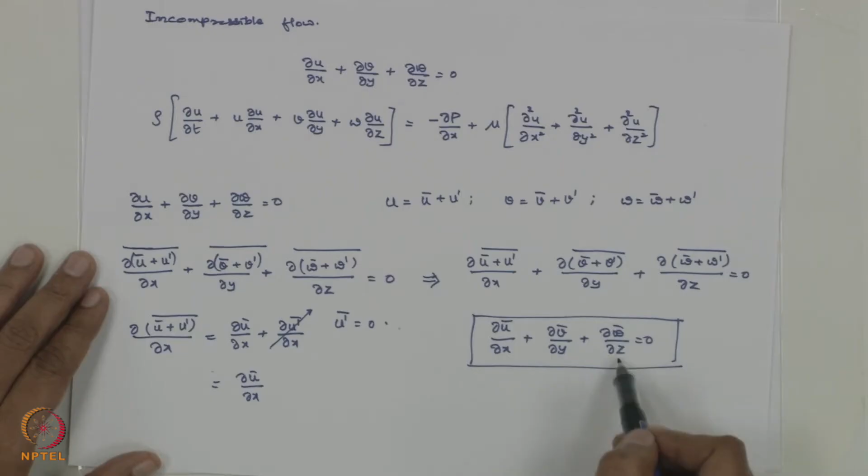In the last module, we had started and defined turbulence, and we introduced the concept of the fluctuating component and the mean motion. We time averaged the incompressible flow continuity equation and got this: del u bar by del x plus del v bar by del y plus del w bar by del z equal to 0. There's nothing new here, the equation looks the same.

Now let us take the x momentum equation. The x momentum equation is rho into del u by del t plus u del u by del x plus v del u by del y plus w del u by del z equal to minus del p by del x plus mu times del squared u by del x squared plus del squared u by del y squared plus del squared u by del z squared.

So you get this. Now let us replace u with u bar plus u prime, v with v bar plus v prime, w with w bar plus w prime, and p with p bar plus p prime, and time average. So we are time averaging the momentum equation. This is also called Reynolds averaging, because Reynolds had apparently done this for the first time.

But before I do that, I need to rearrange this a little. So: rho into del u by del t plus del u squared by del x plus del of uv by del y plus del of uw by del z equal to minus del p by del x plus mu times del squared u by del x squared plus del squared u by del y squared plus del squared u by del z squared.

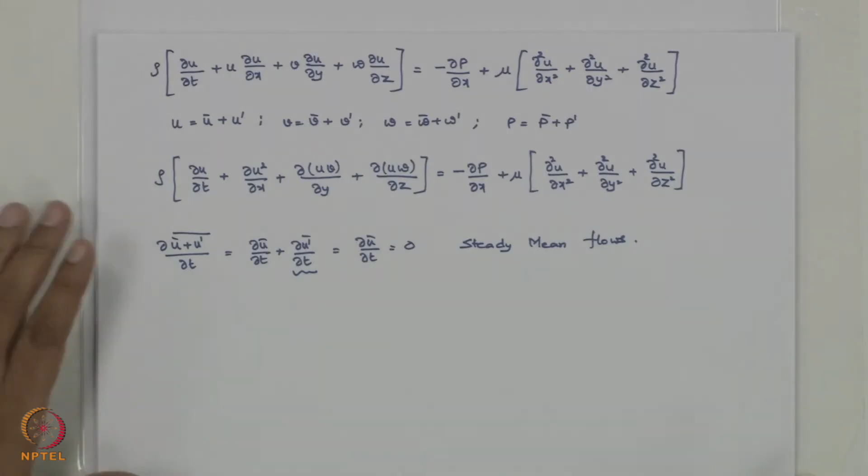But I am considering steady mean flow, that is, if I put a pitot tube and look at my manometer, the manometric value is not changing, so the mean component u bar doesn't vary with time. So del u bar by del t equal to 0. If the flow itself is unsteady, you will never get del u bar by del t as 0. But we are considering steady mean flow.

Now the next term, del u squared bar by del x equals del of u bar plus u prime whole squared bar by del x, which gives del u bar squared by del x plus del u prime squared bar by del x plus del u bar u prime bar by del x. We have seen that if you time average u prime bar, you get 0, so that term vanishes. So I write this as 2u bar del u bar by del x, taking that out, plus del u prime squared bar by del x. This is what we get when we time average del u squared bar by del x.

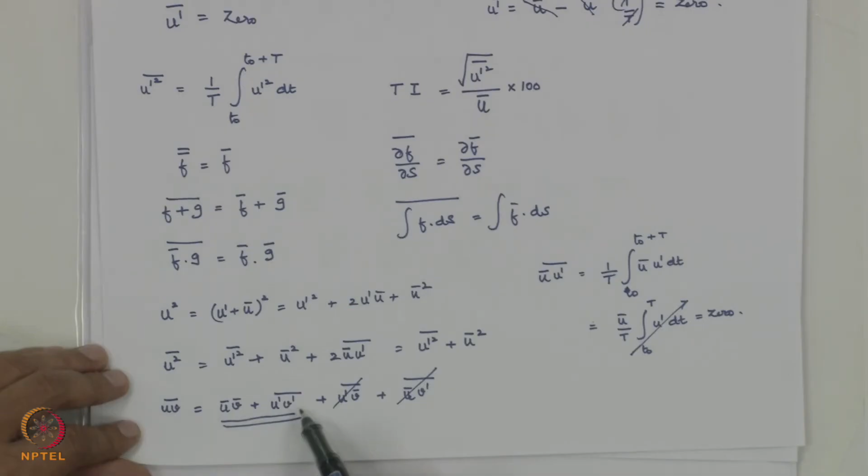Next term is del of uv bar by del y, that is del of u bar plus u prime into v bar plus v prime, bar, upon del y. If you recollect, when we did u bar plus u prime times v bar plus v prime, we ended up getting only u bar v bar plus u prime v prime bar. So here you get del of u bar v bar plus u prime v prime bar by del y. You could also write this as u prime v bar bar plus u bar v prime bar, just for completeness, but these terms will be 0.

So I will expand this: you get u bar del v bar by del y plus v bar del u bar by del y plus del of u prime v prime bar by del y.

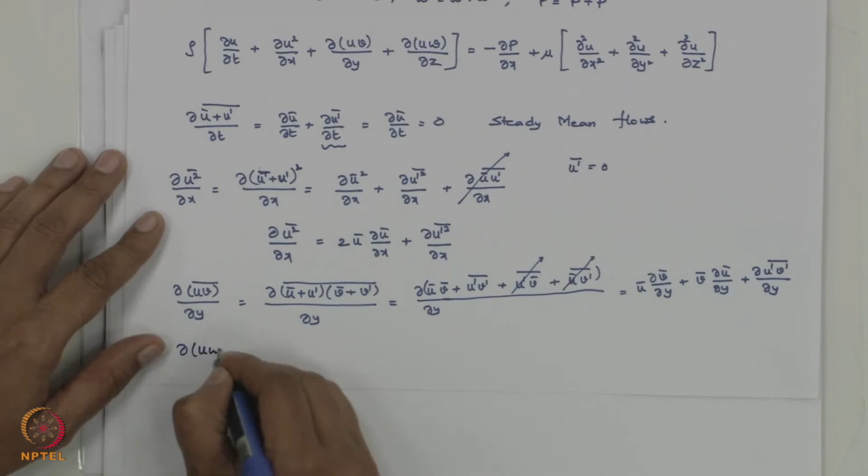Okay, similarly, without doing the full derivation, I can write directly del(u w bar) by del z equal to u bar del w bar by del z plus w bar del u bar by del z plus del(u prime w prime bar) by del z. So that completes the left hand side, all the terms we have completed.

Similarly, I can write directly del(p bar plus p prime bar) by del x equal to del p bar by del x, because del p prime is 0. Similarly, I can write del squared(u bar plus u prime bar) by del x squared equal to del squared u bar by del x squared, because u prime bar is going to be 0.

So substituting all of this in my momentum equation, I will get rho into del(u prime squared bar) by del x plus 2 u bar del u bar by del x plus u bar del v bar by del y plus v bar del u bar by del y plus del(u prime v prime bar) by del y plus u bar del w bar by del z plus w bar del u bar by del z plus del(u prime w prime bar) by del z. This is the left hand side, is equal to minus del p bar by del x plus mu into del squared u bar by del x squared plus del squared u bar by del y squared plus del squared u bar by del z squared.

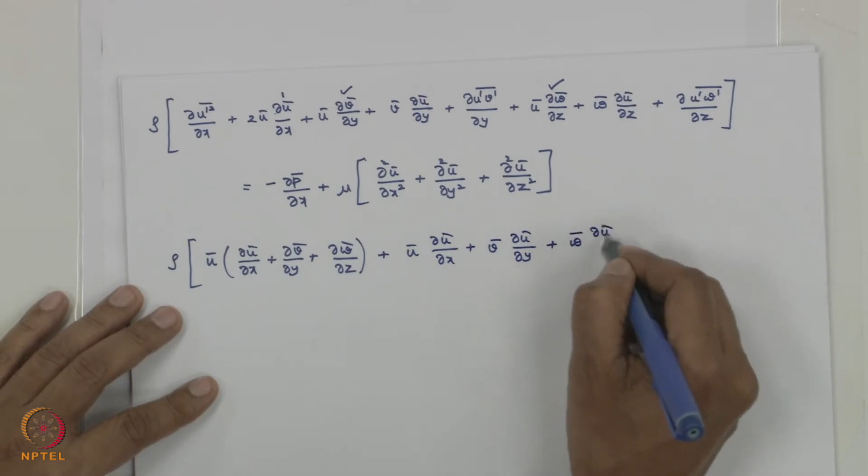Now, if I rearrange this, I can write this as del u bar by del x, taking one term common, plus del v bar by del y, plus del w bar by del z, if I take that. Then I am left with another term, that is u bar del u bar by del x plus v bar del u bar by del y plus w bar del u bar by del z, which is equal to all the terms left out: this one, this one, and this one.

This I am pushing to the right hand side. So I get minus del p by del x plus mu del squared u bar by del x squared plus del squared u bar by del y squared plus del squared u bar by del z squared minus rho, del(u prime squared bar) by del x plus del(u prime v prime bar) by del y plus del(u prime w prime bar) by del z.

So let us write, similarly, for y and z momentum equations. Let me write the y momentum equation first. So that is minus rho of... this has vanished, this is 0 by continuity.

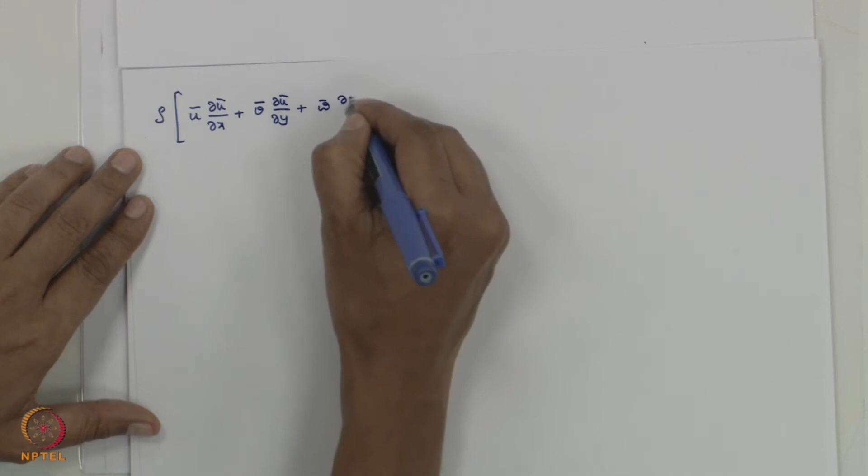So now let me write all the momentum equations. Rho into u bar del u bar by del x plus v bar del u bar by del y plus w bar del u bar by del z is equal to minus del p by del x plus mu del squared u bar, minus rho of del(u prime squared bar) by del x plus del(u prime v prime bar) by del y plus del(u prime w prime bar) by del z.

Similarly, the y momentum equation: rho of u bar del v bar by del x plus v bar del v bar by del y plus w bar del v bar by del z is equal to minus del p bar by del y plus mu del squared v bar, minus rho of del(u prime v prime bar) by del x plus del(v prime squared bar) by del y plus del(v prime w prime bar) by del z. That was the y momentum equation.

Let's write the z momentum equation: u bar del w bar by del x plus v bar del w bar by del y plus w bar del w bar by del z is equal to minus del p bar by del z plus mu del squared w bar, minus rho del(u prime w prime bar) by del x plus del(v prime w prime bar) by del y plus del(w prime squared bar) by del z.

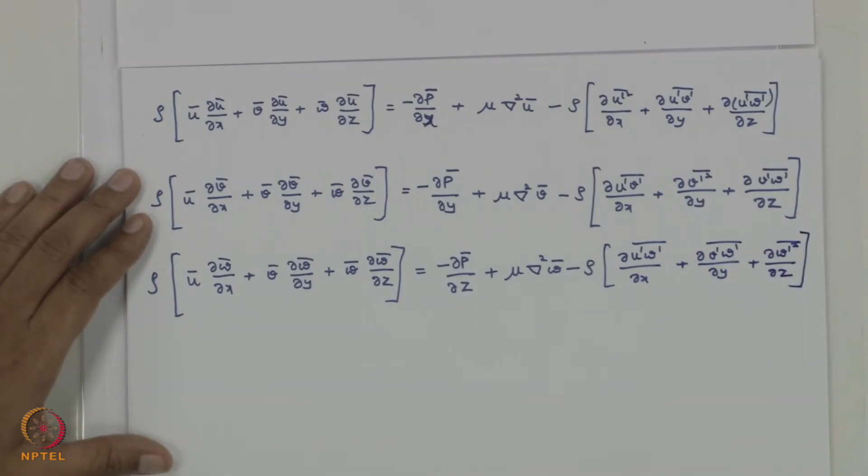Now what are these? If these equations were not there, and you only see the left hand side terms, these were the equations which we were seeing earlier. These are the terms which have come additionally because of Reynolds averaging.

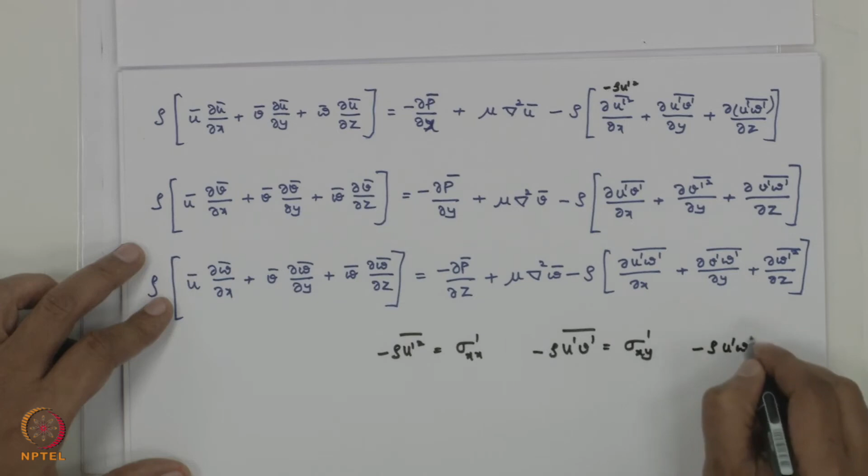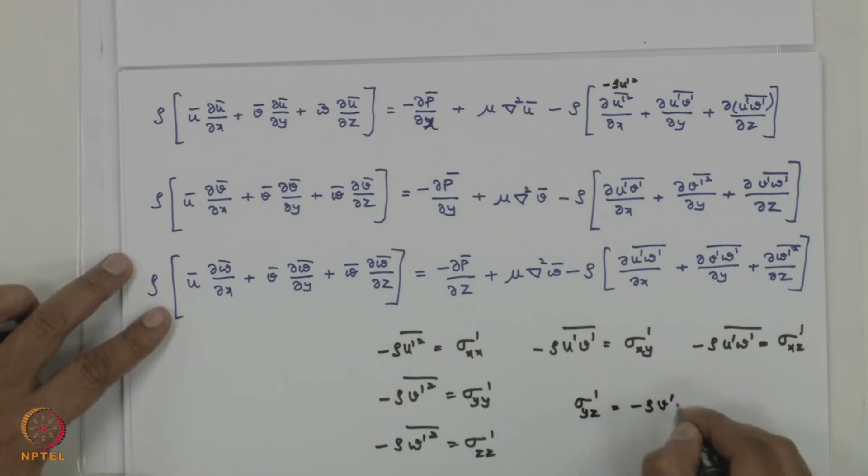So these terms can be visualized: minus rho u prime squared bar can be visualized as sigma xx prime, minus rho u prime v prime bar as sigma xy prime, and minus rho u prime w prime bar as sigma xz prime. Similarly, minus rho v prime squared bar as sigma yy prime, minus rho w prime squared bar as sigma zz prime, and sigma yz prime equals minus rho v prime w prime bar. Prime represents additional shear stress.

So what are these stresses? These stresses are additional stresses: sigma xx prime, sigma yy prime, sigma zz prime, sigma xy prime, sigma xz prime, sigma yz prime. These are the additional stresses in addition to our normal stresses.

In fact, we had sigma xx, yy, zz and sigma xy, sigma xz, which we wrote in terms of viscosity and the derivatives of the velocities - that is linear deformation and angular deformation. We put all of those together, and these are called additional stresses. They are also called Reynolds stresses because these were first derived by Reynolds in 1895.

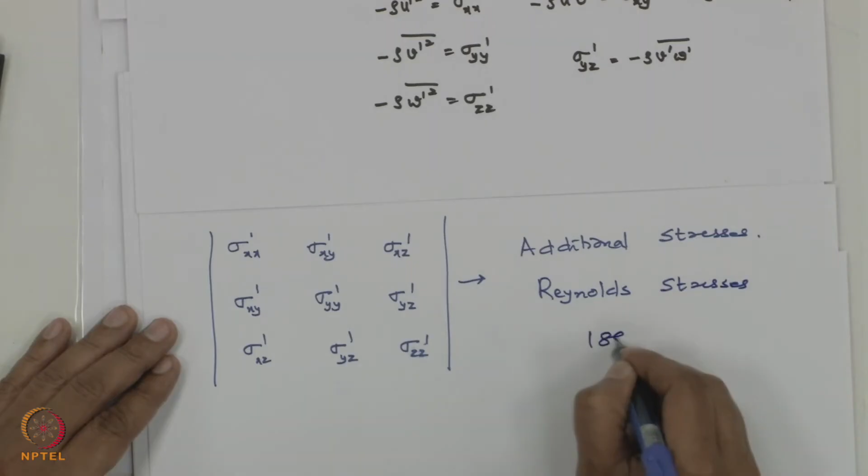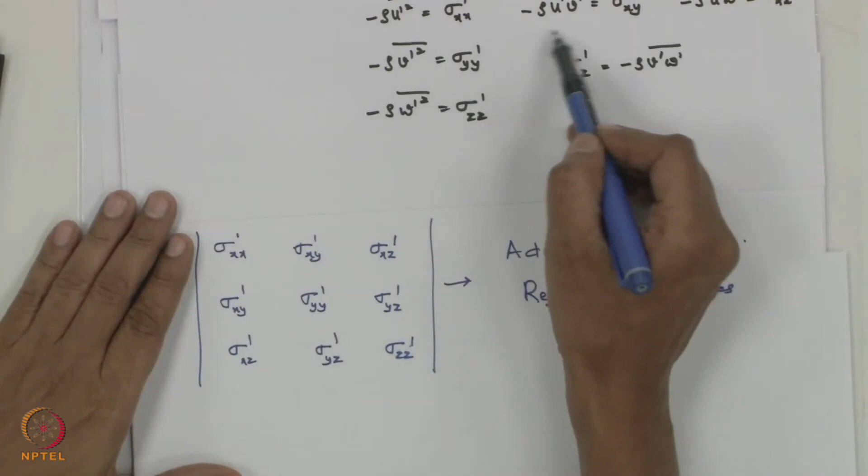So then there is one doubt all of us get: is minus rho u prime v prime really negative? No, actually minus rho u prime v prime happens to be positive. So what is the physical significance?

Let's consider a plane shear flow where the velocity varies like this - this is y, this is x, and this is the velocity profile. So u bar is a function of y, and v and w are 0. Now du bar by dy is greater than 0.

Let's say there is a transverse motion causing eddies to approach the layer y, meaning v prime is greater than 0, moving from a lower layer y to y plus l. So v prime is greater than 0. But since u is increasing from y to y plus l, the eddies essentially retain their original velocity u bar, so they end up with a negative u prime when moving with positive v prime. So minus rho u prime v prime is going to be positive.

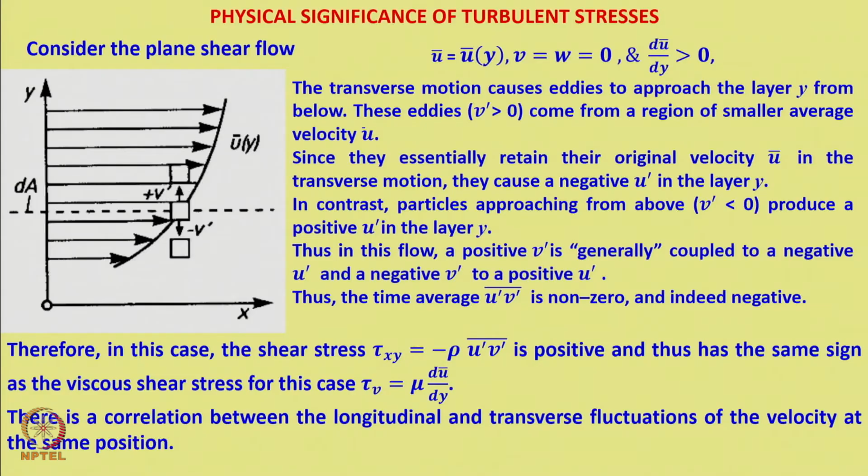So to summarize: if you have a positive v prime, you will have a negative u prime; if you have a negative v prime, you will have a positive u prime. So essentially u prime v prime is negative and non-zero, meaning minus rho u prime v prime is positive.

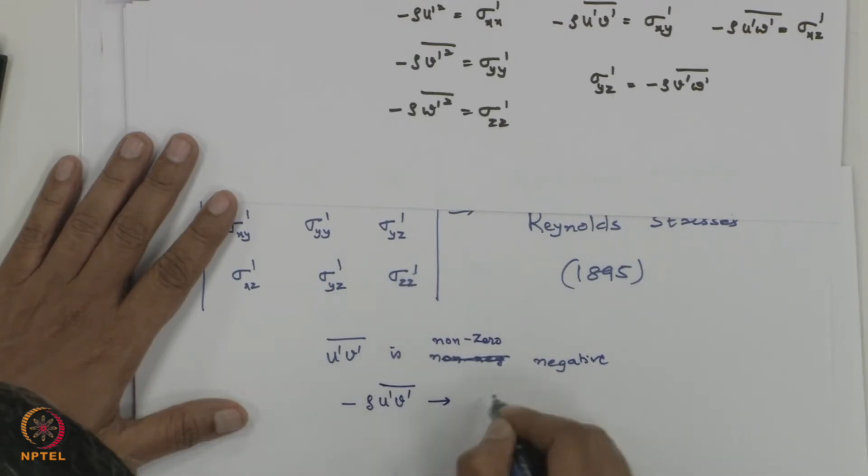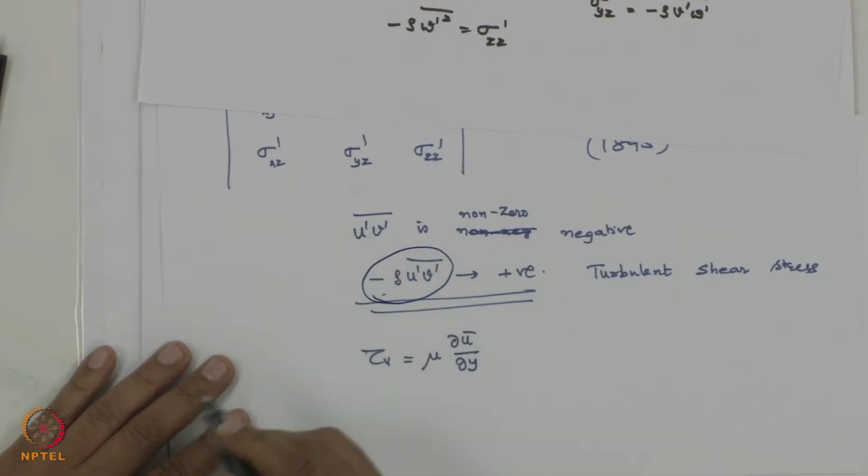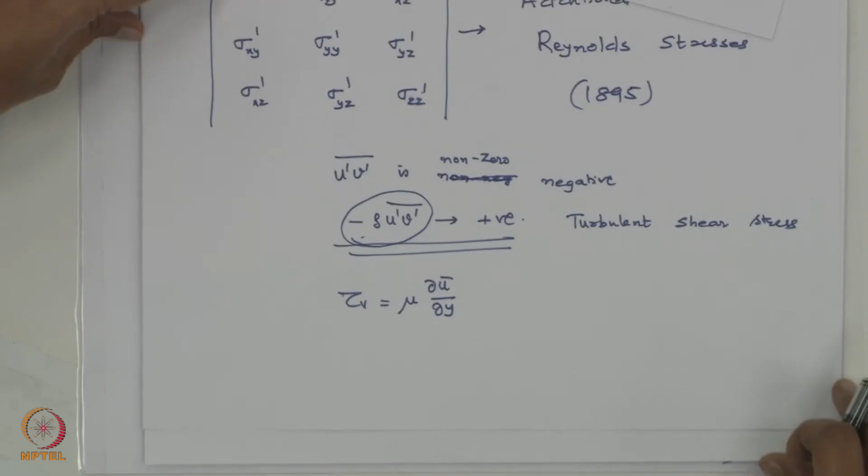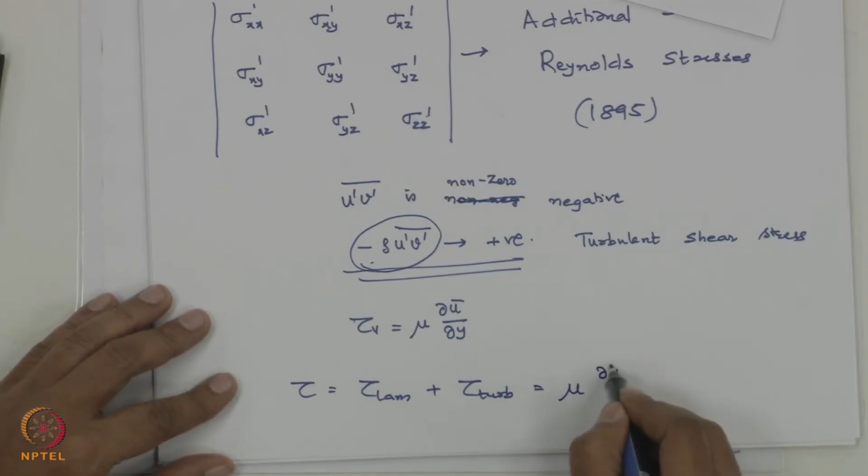So what is this? This is the turbulent shear stress, over and above the viscous shear stress. What was my viscous shear stress? Tau v equals viscous mu del u bar by del y. This stress, minus rho u prime v prime, is the turbulent shear stress over and above the viscous stress. That means total tau can be visualized as tau laminar plus tau turbulent, which is mu del u bar by del y minus rho u prime v prime bar.

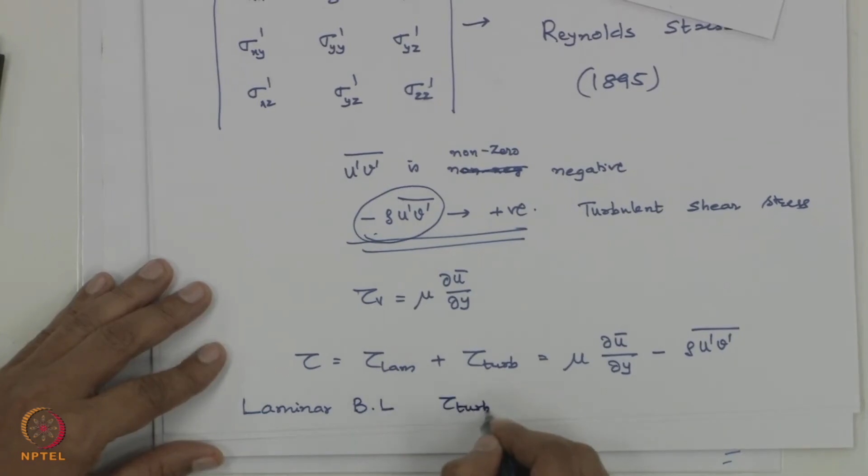If it is laminar flow or laminar boundary layer, you will have tau turbulent equal to 0, because u prime is 0 and v prime is 0. There are no fluctuating components.

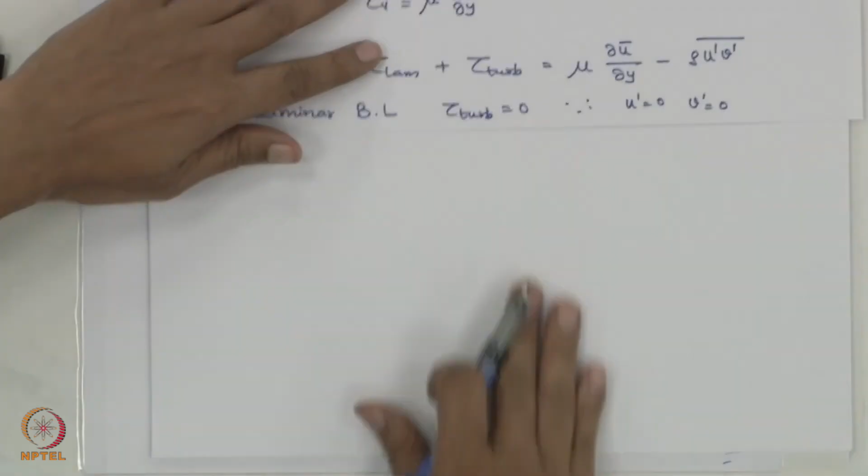But if it is a turbulent boundary layer, you can directly write tau equal to tau turbulent, that is minus rho u prime v prime bar, because tau laminar will be very much smaller than tau turbulent.

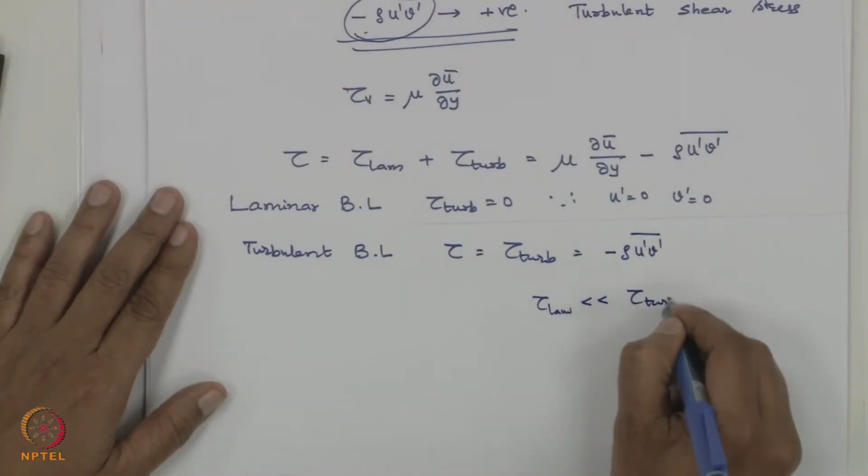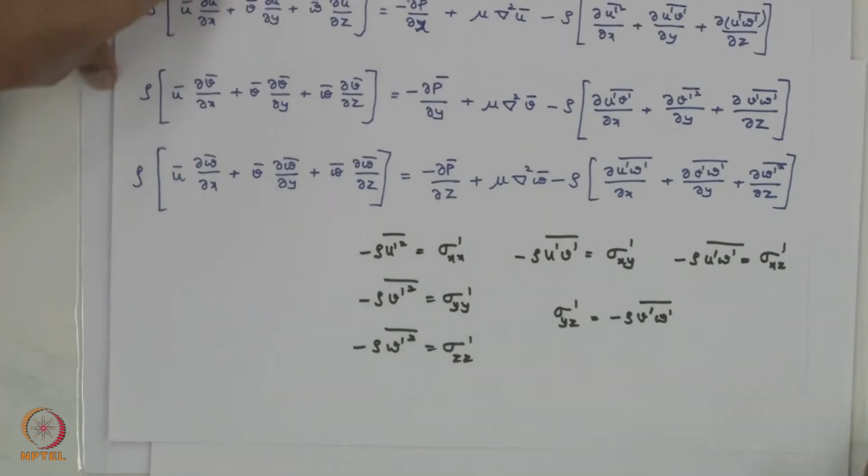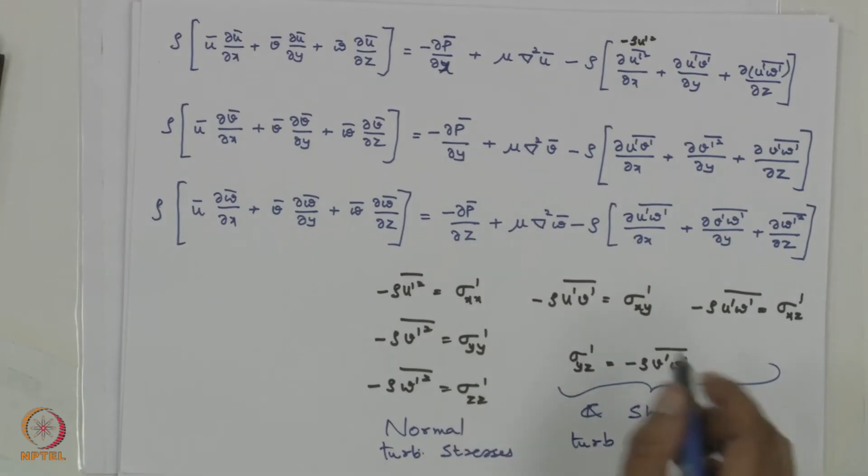So what we understood is that because of Reynolds averaging, in a turbulent flow you have 6 additional shear stresses: sigma xx, sigma xy, sigma xz, yy and zz. These are called normal turbulent stresses, and these are called shear turbulent stresses. These stresses have come additionally over and above the terms we had. That is the summary of what we understand here.

Now let me introduce what is called the universal velocity profile. Why is it called universal? Because this profile is valid for both internal flows and external flows - the universal velocity profile.

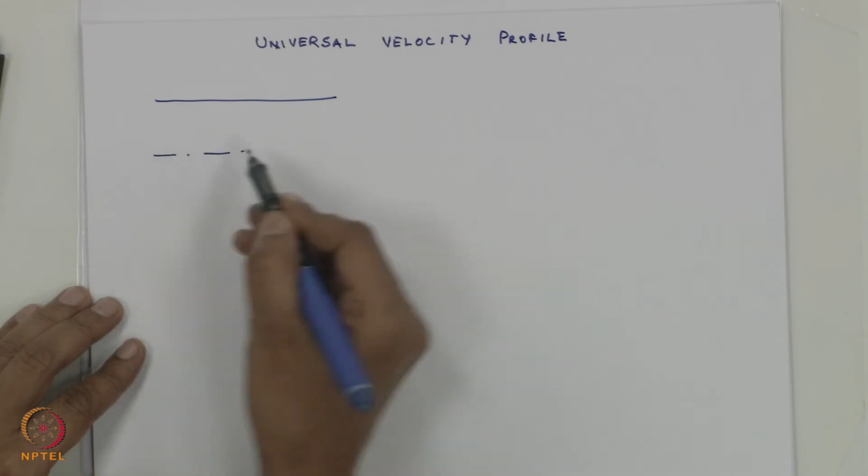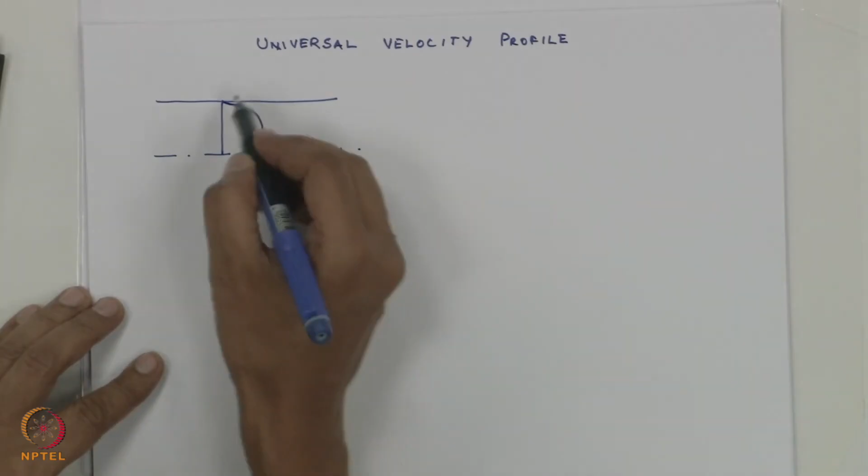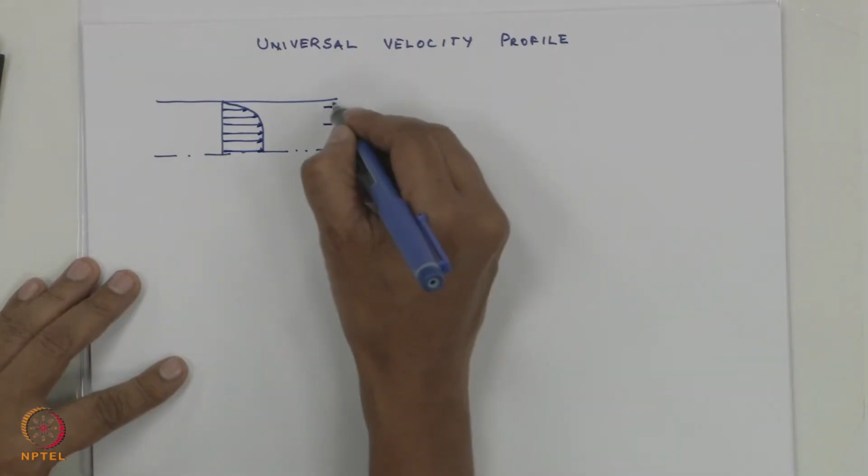Let me take internal flow - if I take pipe flow, with this as the center of the pipe, the velocity profile would be, as we know, a flat profile. So you have three regions in this: region 1, 2, 3. One is the viscous sublayer.

Two is the overlap layer, also called the buffer layer, not butter but buffer. Three is the outer layer, also called the turbulent layer.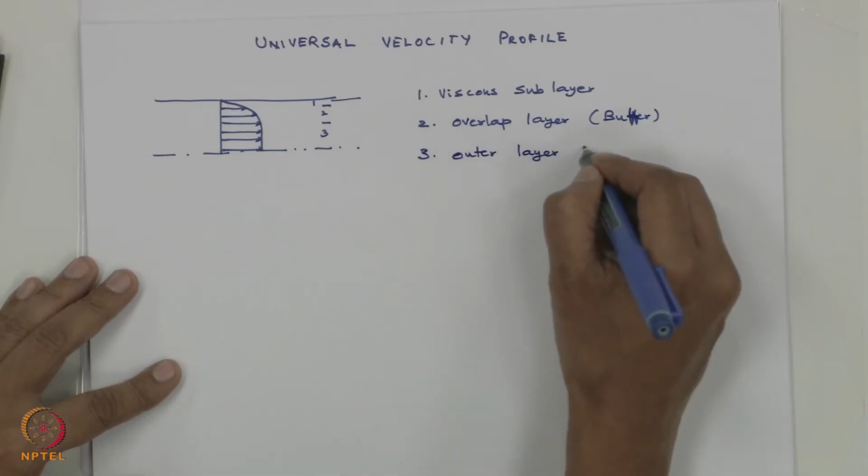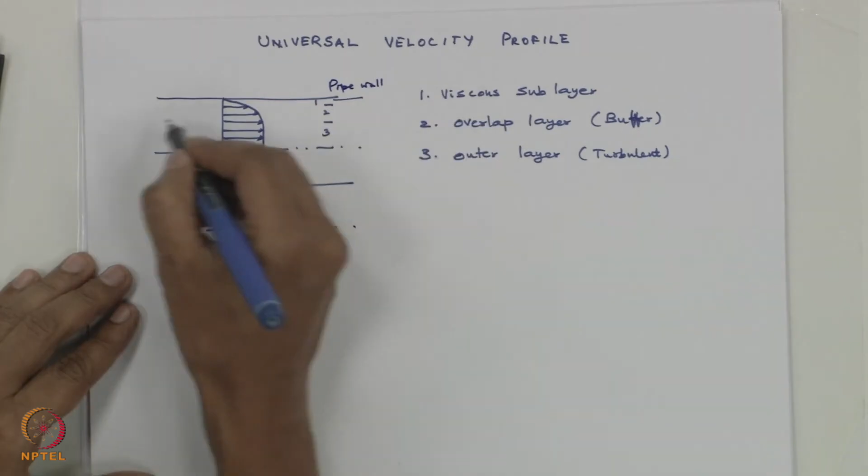So if I were to plot this stress, this is my pipe wall, and this is R, capital R, this is how R goes and this is how Y goes. So this is my shear stress. At the center the shear stress is 0, but as you move nearer the wall the shear stress increases. But what is the laminar and turbulent component? It will be something like this.

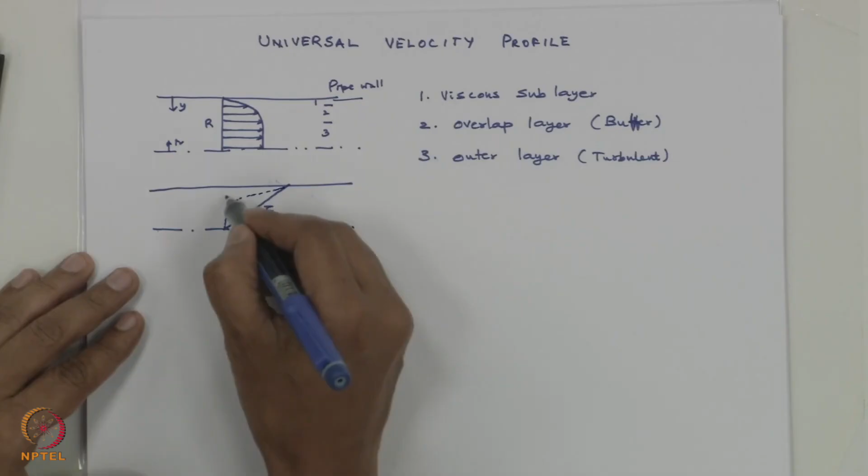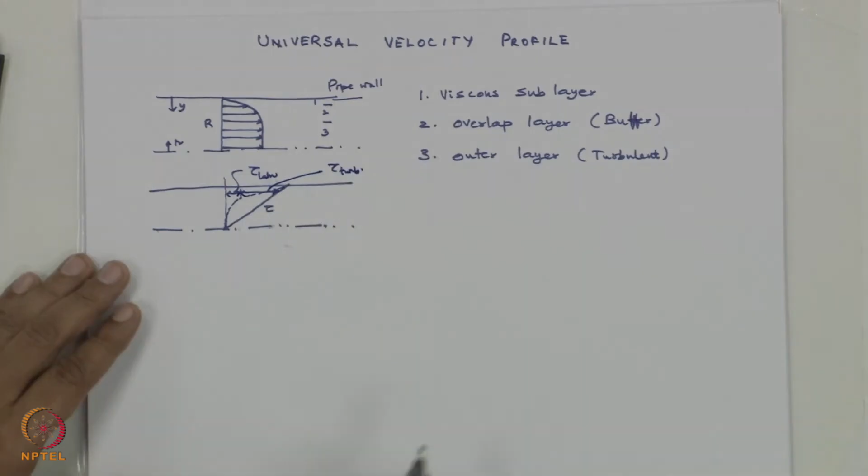This is the laminar component, tau laminar, and this is tau turbulent. As you come nearer to the wall, the laminar component is increasing. As you move away from the wall, the turbulent component is increasing.

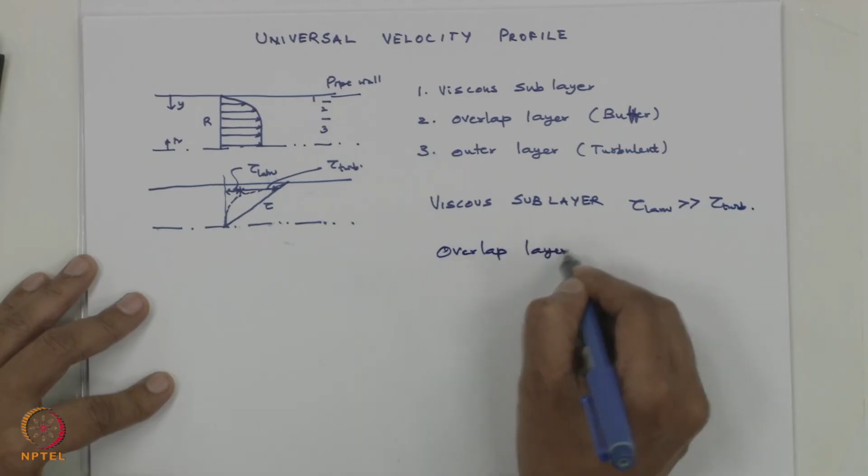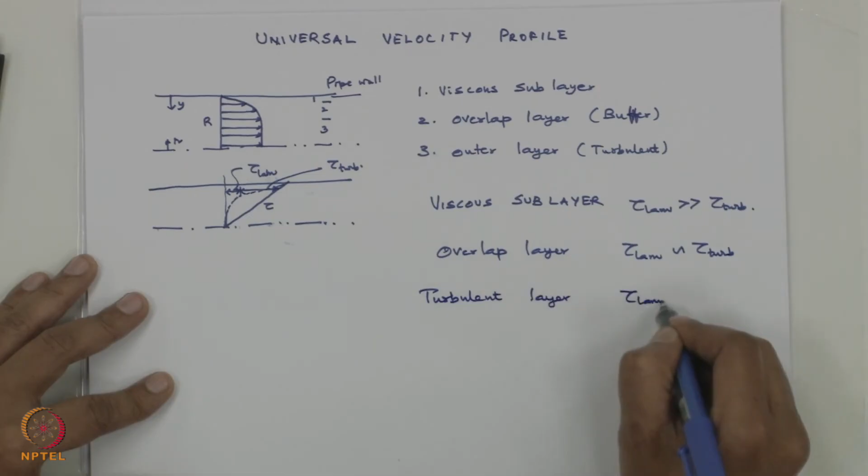That means in the viscous sublayer, laminar shear stress is greater than turbulent shear stress, because in the viscous sublayer there are no fluctuating components. In the overlap layer, tau laminar is of the same order as tau turbulent, and in the turbulent layer tau laminar is less than tau turbulent, that is, tau turbulent is greater than tau laminar.

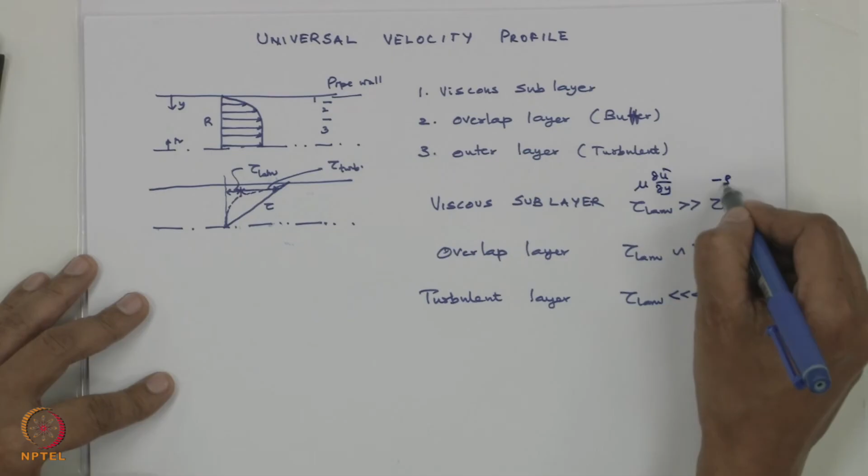That means tau laminar is mu del u bar by del y, and tau turbulent is, just to give you the feel, minus rho u prime v prime bar. So this is what we understand.

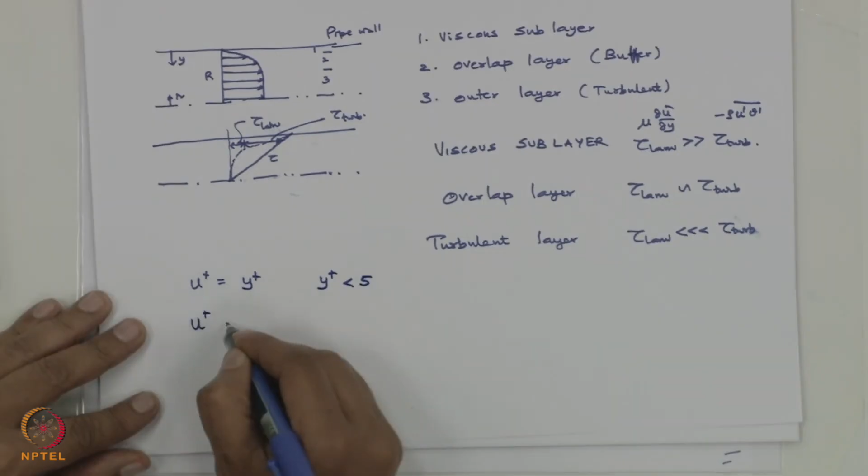Then what is the universal velocity profile? Universal velocity profile has 3 layers. For the viscous sublayer, u plus equals y plus for y plus less than 5, and u plus equals 5 log of y plus minus 3.05 for y plus between 5 and 30. This is the viscous sublayer, this is the buffer layer, this is the turbulent layer, where u plus equals 2.5 log of y plus plus 5.5.

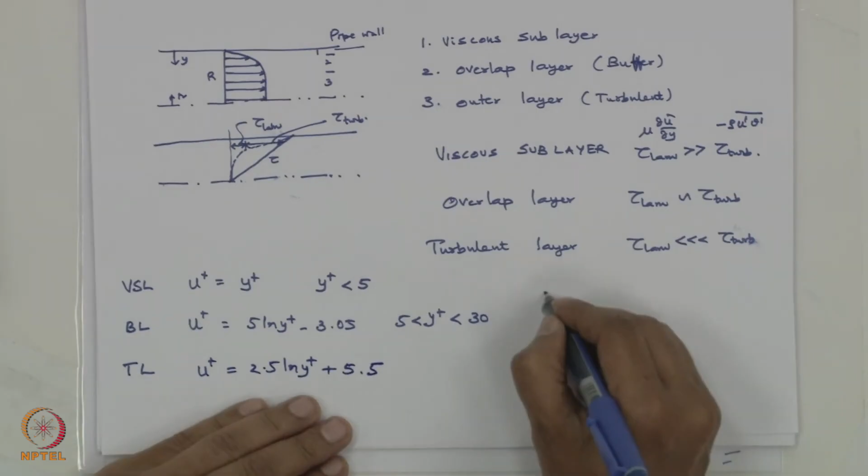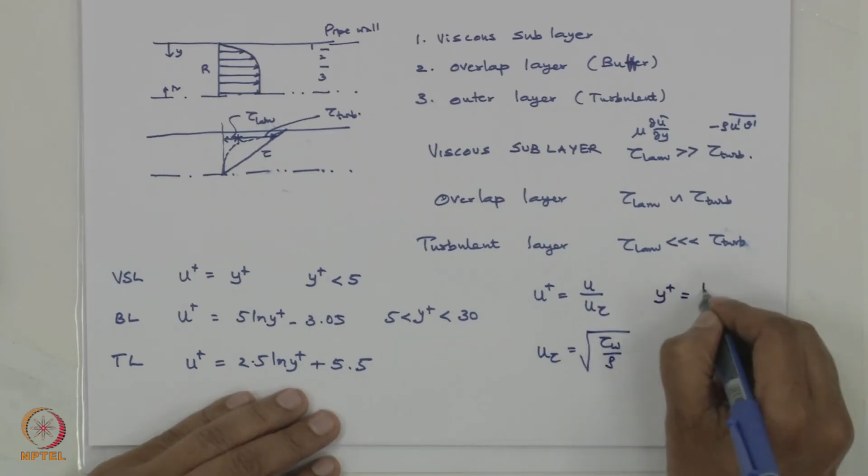So what is u plus? U plus equals u by u tau. And what is u tau? U tau equals square root of tau wall by rho. What is y plus? Y plus equals y u tau by nu.

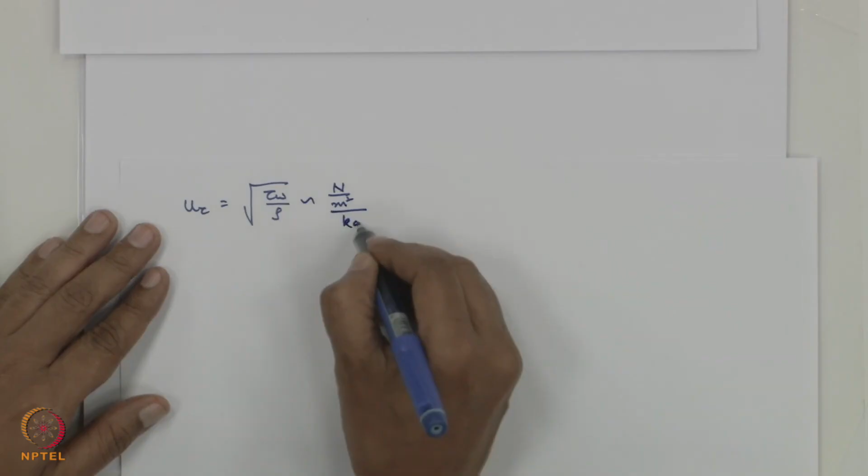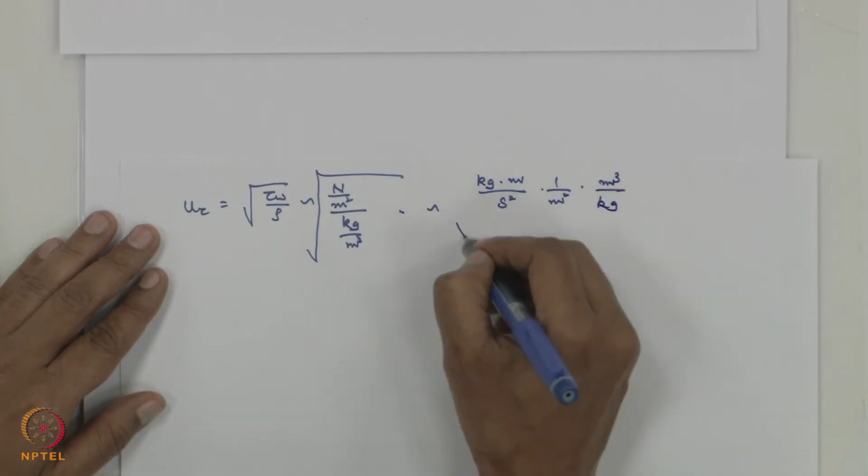What is the unit of u tau? U tau equals square root of tau wall by rho. What is the unit of tau wall? Pascal, that is Newton per meter square upon kg per meter cube. Newton is kg meter per second squared per meter squared, into meter cube per kg, square root of this. What do I get? Kg gets cancelled out, so I get this of the order of meters per second.

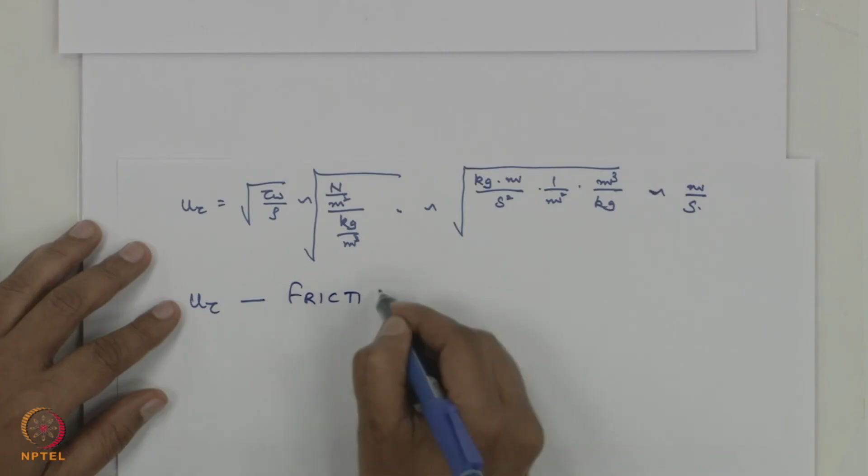So u tau is called the frictional velocity. U tau is called the frictional velocity.

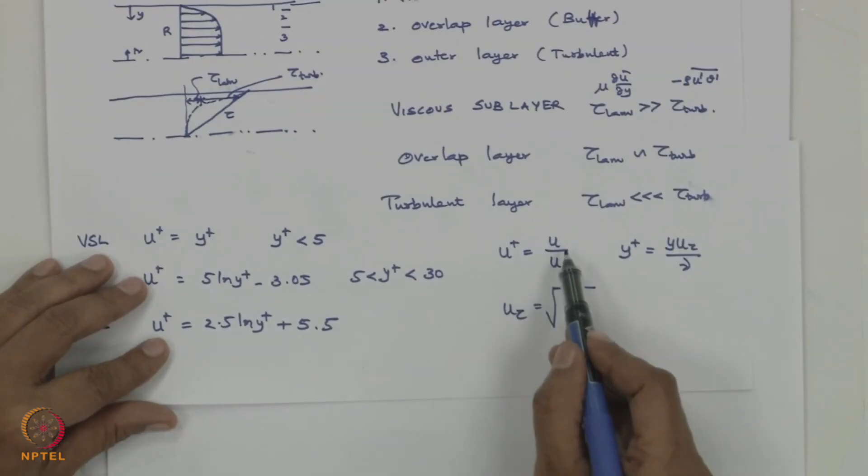You notice that now u plus is non-dimensional because it is u by u tau. What about y plus? Is it non-dimensional? Y plus equals y u tau by nu, that is y is in meters, u tau is meters per second, nu is meters squared per second. So this is also dimensionless.

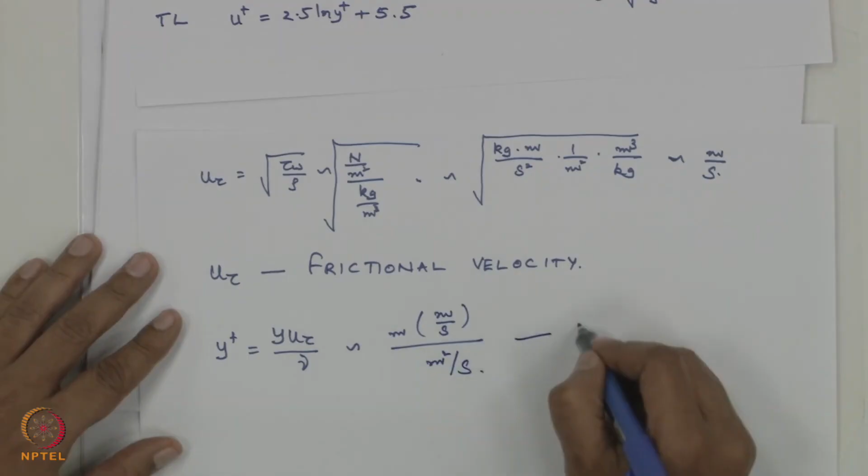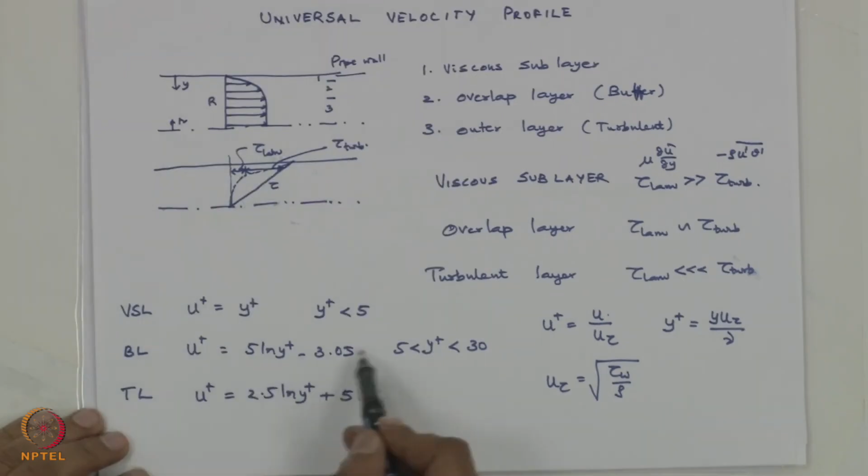Without derivation I have stated this. This is what is called the universal velocity profile. But these constants have come from experiments. In the next module I will show you how these have come from experiments.

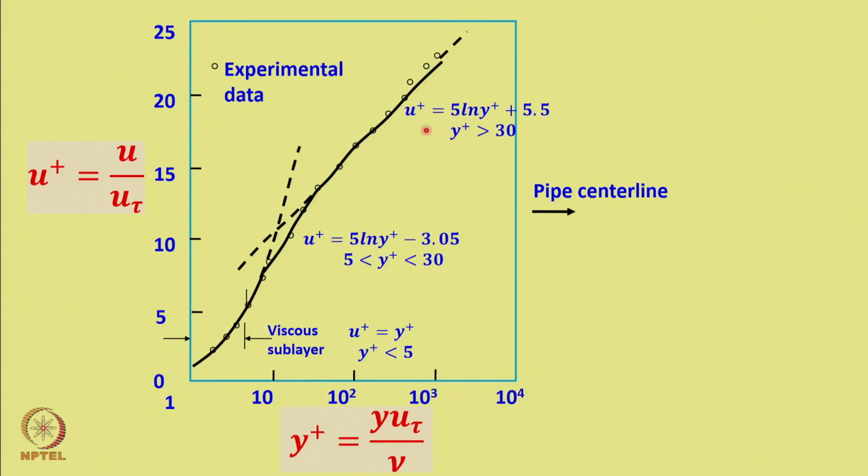So in the slides, if you see here, u plus versus y plus has been plotted. Here you can see that the experimental data matches well. In the viscous sublayer it varies linearly, u plus varies linearly with y plus, and in the buffer layer it is 5 log of y plus minus 3.05, and in the turbulent layer it is 5 log of y plus plus 5.5. In the next module we shall take up the energy equation, time average it, and see what additional terms we get.

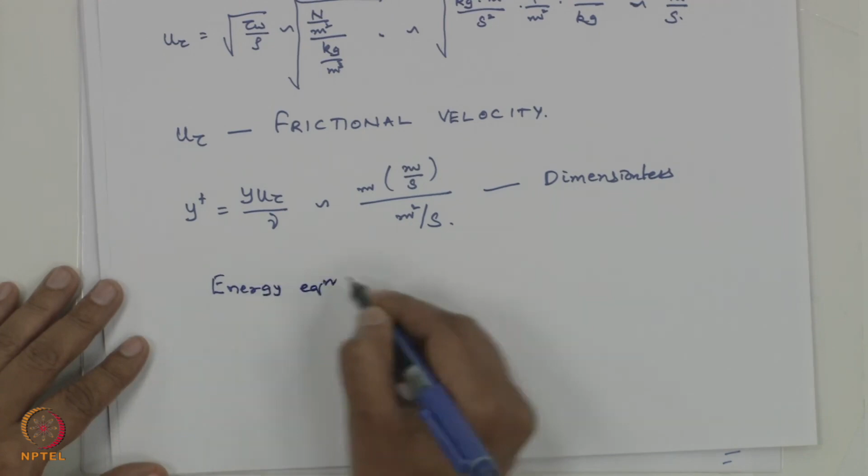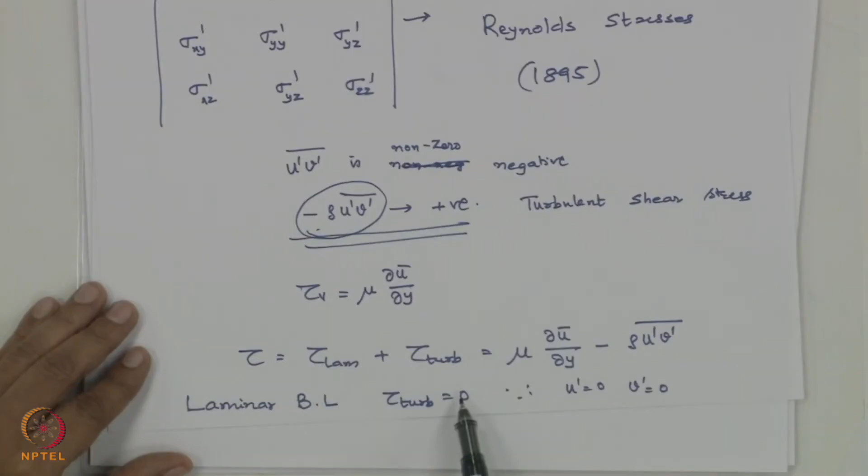So with this, in today's module we have time averaged the equations and found that the main takeaway is that we have found additional stresses. These additional stresses are the normal turbulent stresses and the shear turbulent stresses. So the total stress is laminar plus turbulent, tau equals tau laminar plus tau turbulent. This is the major takeaway from this module.